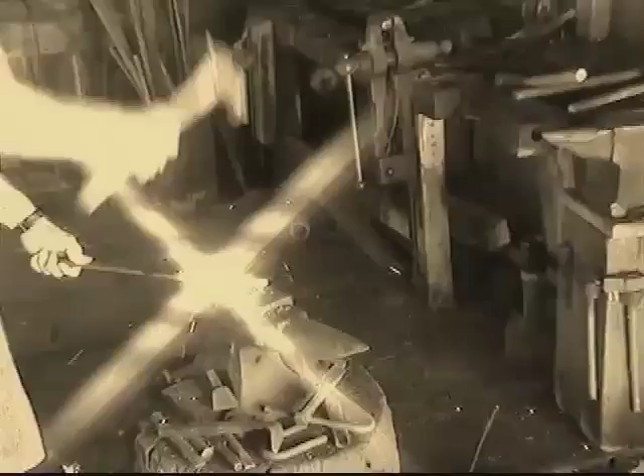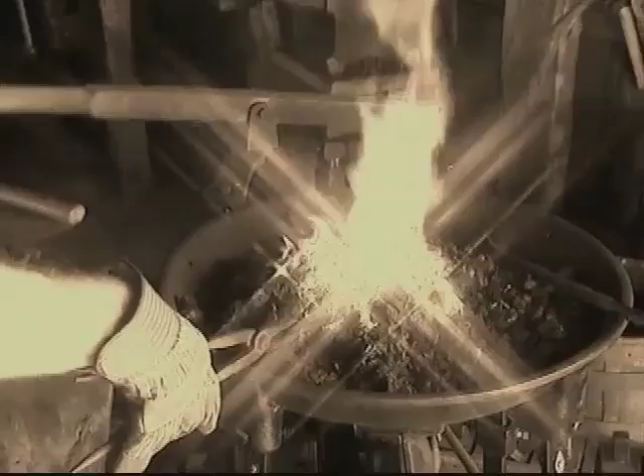Come take a journey back with us to the past, back when our company was born. A blacksmith in Cuyahoga Falls, Ohio, Eugene Cornwell, interpreted America's growing economy and feeling of well-being to mean a desire for quality. Eugene Cornwell started experimenting, trying to find the key to making a more durable punch and chisel, so the story goes. He stumbled upon a method of hardening them better than anyone else knew, and Cornwell Quality Tools was born.

On November 7, 1919, the Cornwell Quality Tools Company was incorporated in an old tannery building along the Cuyahoga River in Cuyahoga Falls, a suburb of Akron, Ohio. Cornwell employed 6, and as a testament to these early pioneers in toolmaking, many of their original tools are still in service today. Another discovery of Cornwell was most obviously discovered by his crude common sense, that of requiring a broken carriage axle of anyone desiring to purchase a punch or chisel from him.

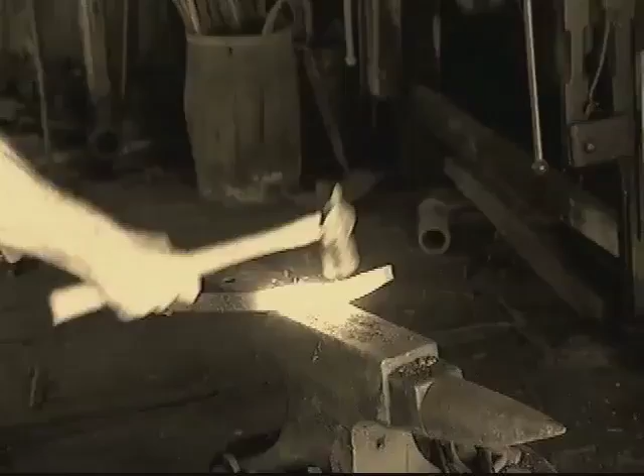In an age when iron was king, good steel was the exception rather than the rule. Having tried a bevy of metals for his use, Cornwell found the carriage axle steel was perfectly suited for punch and chisel forming. Over 8 decades ago, Cornwell became one of the first tool craftsmen to realize that 3 main keys to quality were the steel, the forging of it, and the method of heat treatment used.

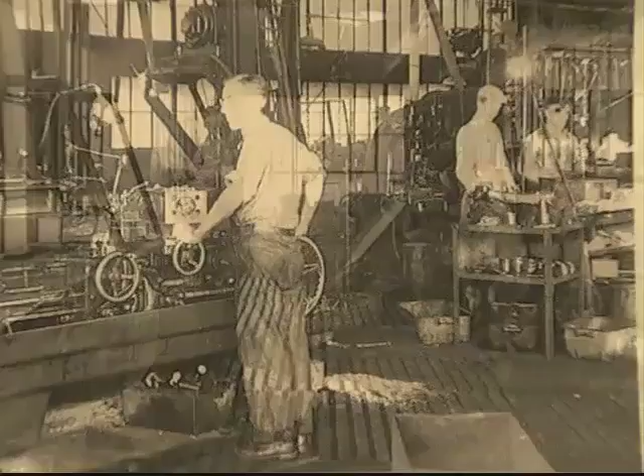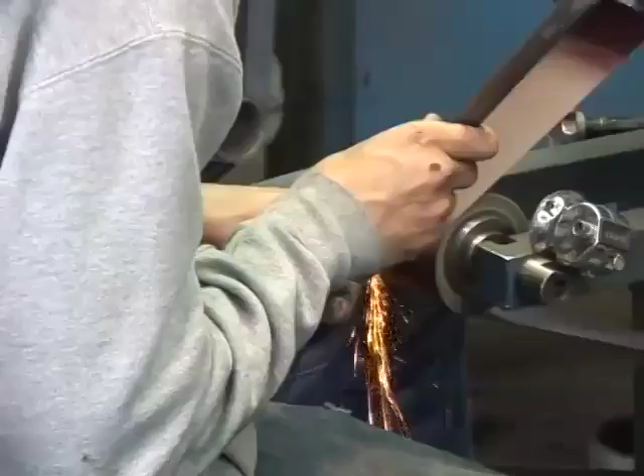In 1927, Cornwell Quality Tools needed to expand their facilities, and the Cornwell family moved their business to a site in Mogadore, Ohio. Although some of our manufacturing processes have been updated to utilize modern state-of-the-art equipment, Eugene Cornwell's desire for craftsmanship and high-quality product remain intact. It all starts with steel, the proper steel made only in the U.S. Remember Eugene Cornwell's formula for making tools?

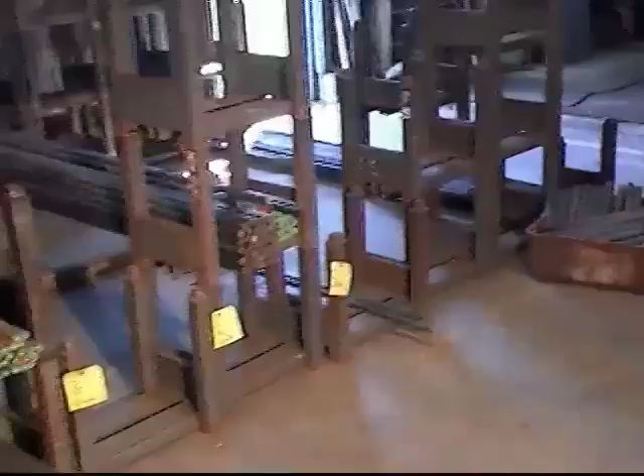Our Albion, Pennsylvania forging plant produces parts from raw steel to finish forgings for our wrench and ratchet product families. When the steel arrives in Albion, it is tagged and color-coded. Then it's inspected for proper hardness, fractures, scaling, and so on. Let's watch a wrench being produced. A shop routing tells the craftsman what steel is to be used for the job.

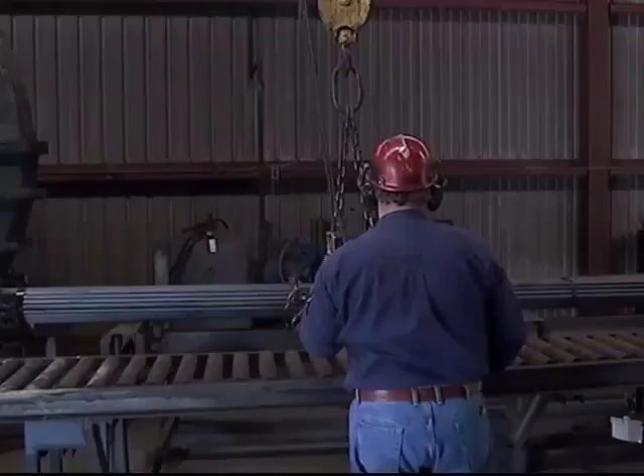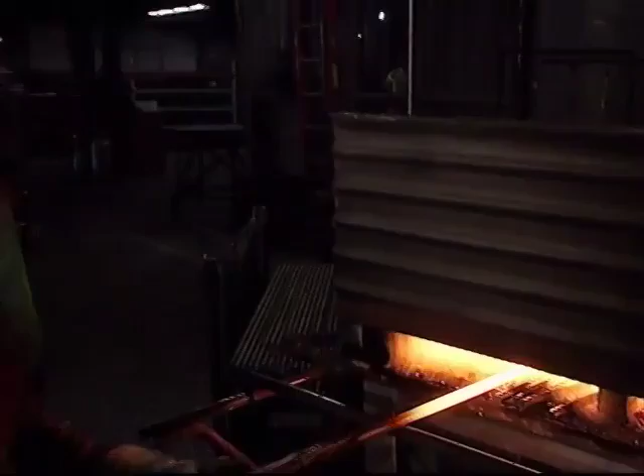Steel is taken to the shearing machine feeding bed to be sheared to forging lengths. Each bar will produce 4 to 6 forgings. The bars are racked and taken to the forging shop. A skilled craftsman heats the steel bars until the temperature is orange-yellow, roughly 2,000 degrees.

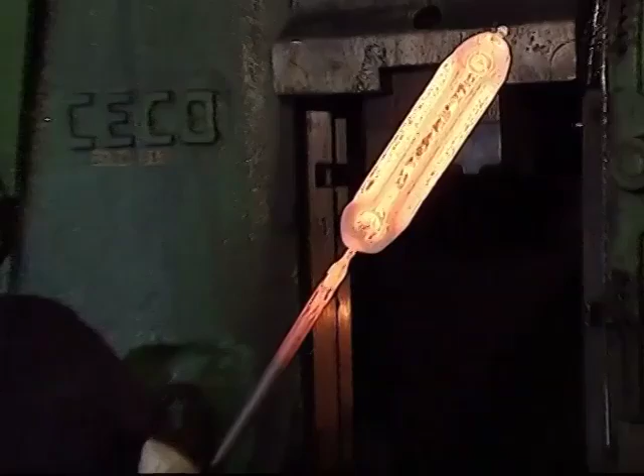The hot steel is then put through a series of 4-cavity dies to produce the raw forging one at a time. Roller, blocker, finisher, trim. It happens in quality steps. One piece of steel to raw forging by one craftsman, one at a time.

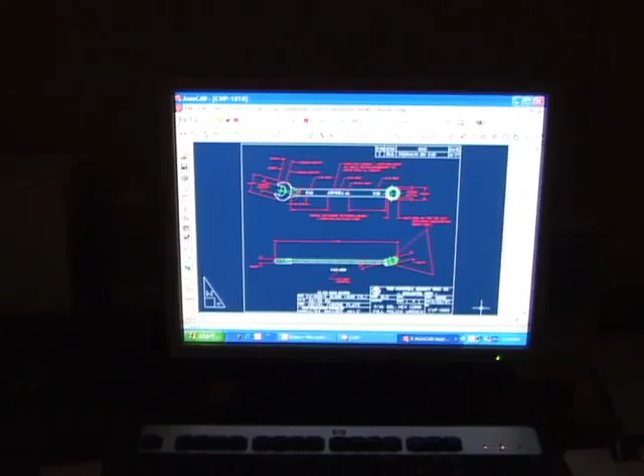You have seen how the forging operation prepared the tools for finishing in Mogadore. Now let's follow a few tools through the steps. Let's watch how combination wrenches are produced. All tools are produced from orders generated by inventory control for open stock as well as sets. The production process is guided through the shop by a shop routing. This routing jacket contains the routing and drawing for the CWP 2272 11/16" combination wrench, and it's the Bible for the production of the tool.

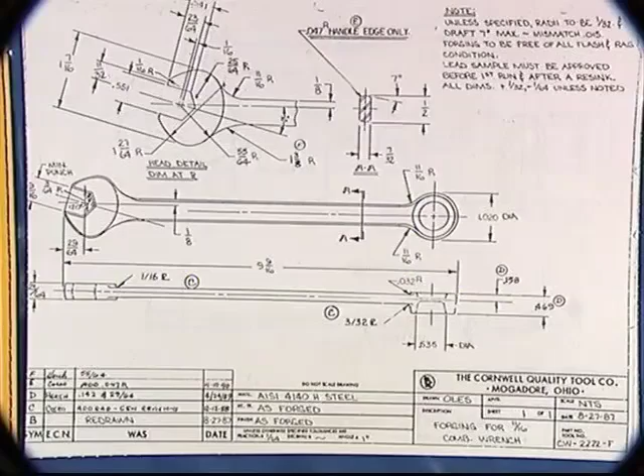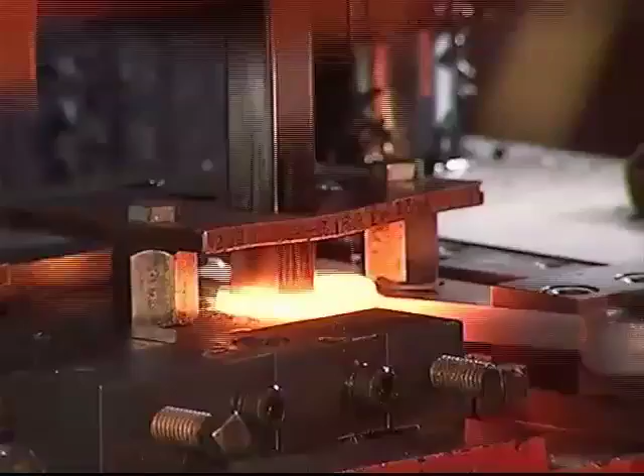It takes an average of 24 steps to process a combination wrench. Punching. Each end of the wrench is punched. The open end of the wrench is then placed in the press facing right, then flipped over facing left. The boxed end is also punched in 2 steps. Wrench forgings are placed on the furnace shelf, heated by induction to a precisely controlled 1500 degrees, or a cherry red color. Note, the operator does not let the part get too hot. Punching a part that's too hot can lead to scaling and quality issues.

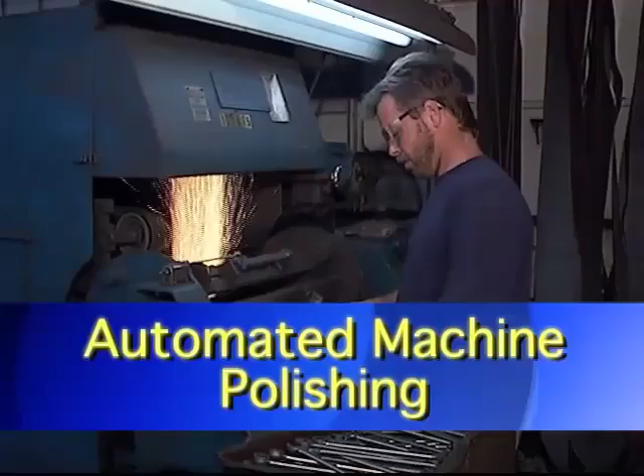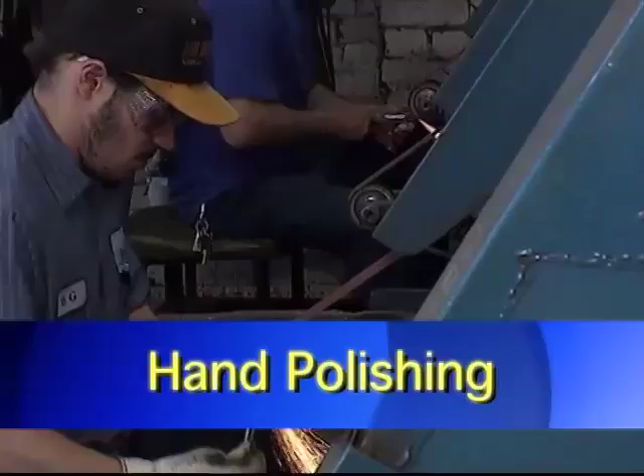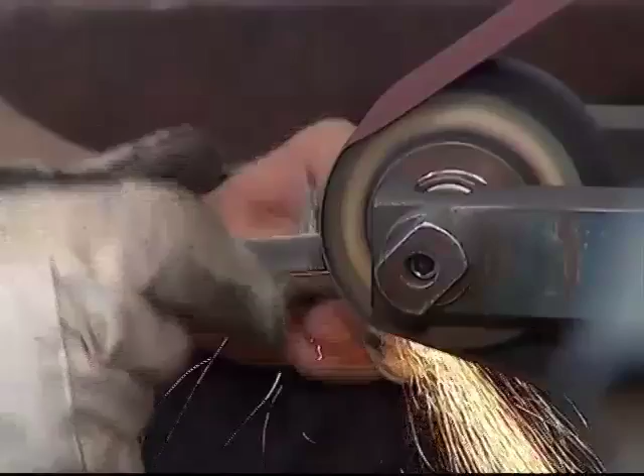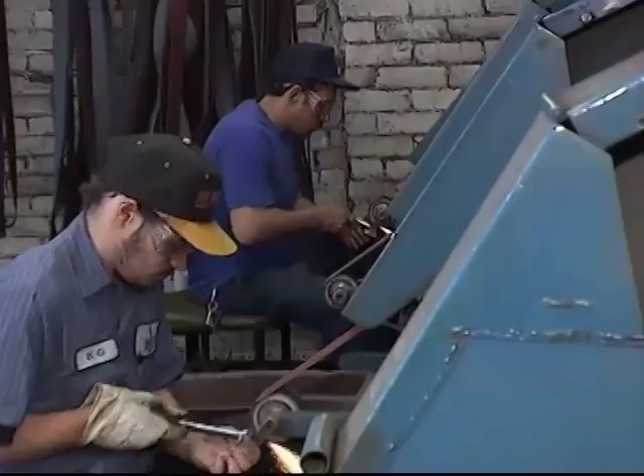Automated machine polishing. You're watching a Ryman polisher. This machine provides a consistent polish to the flats and edges of the wrench forging in preparation for hand polishing. Hand polishing. There's a need for skill in the polish department. An employee must have a good eye and hand coordination. The operator must also possess a good sense of what is cosmetically acceptable in a finished polishing operation. The operator determines the speed in which he can obtain the best results. This is why a good eye and hand coordination becomes so essential. The employee develops a rhythm while working on a particular part.

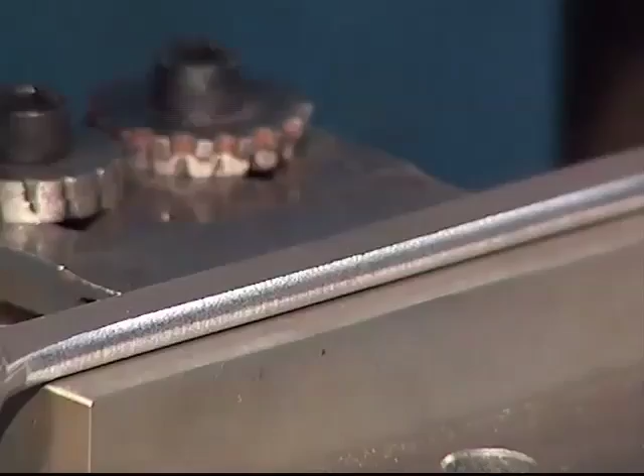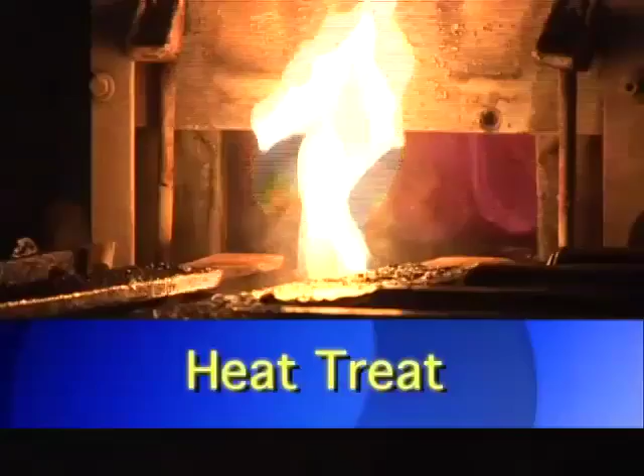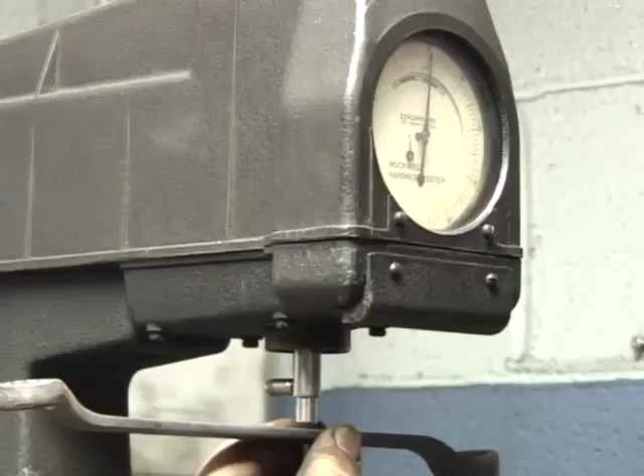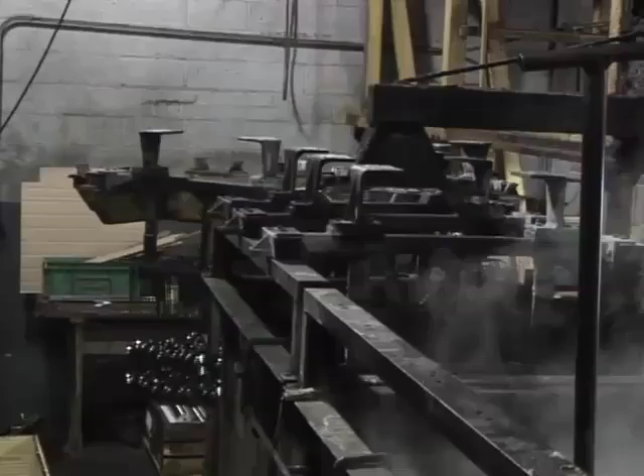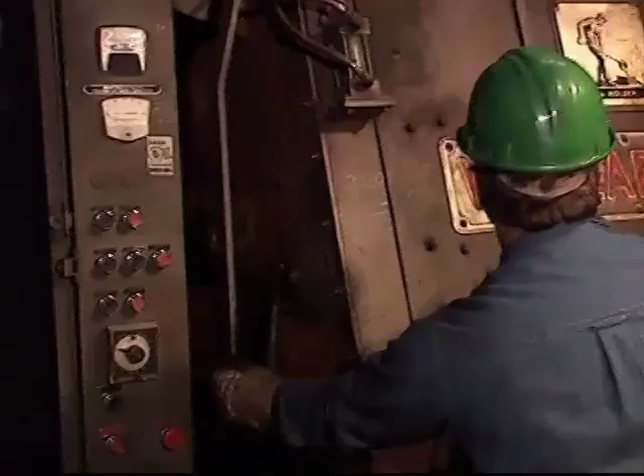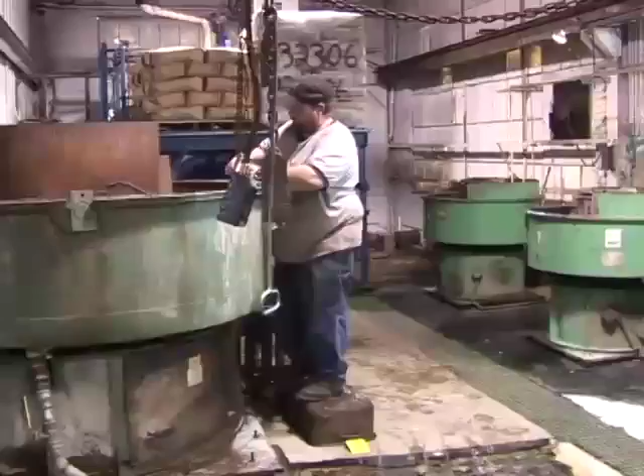Wheelabrator. Wrenches are put in and blasted with steel abrasive shot to remove scale created during heat treating. The blasting operation takes 5 to 20 minutes to accomplish. Vibrators. This operation is the last before chrome plating. The parts are loaded into the bowl with ceramic stones and chemicals. The steel reacts to the chemicals and the stones polish the steel clean, causing a smooth yet high luster polish. Chrome plating.

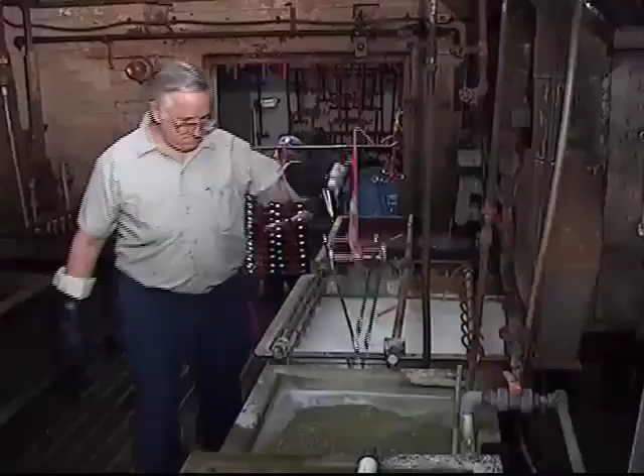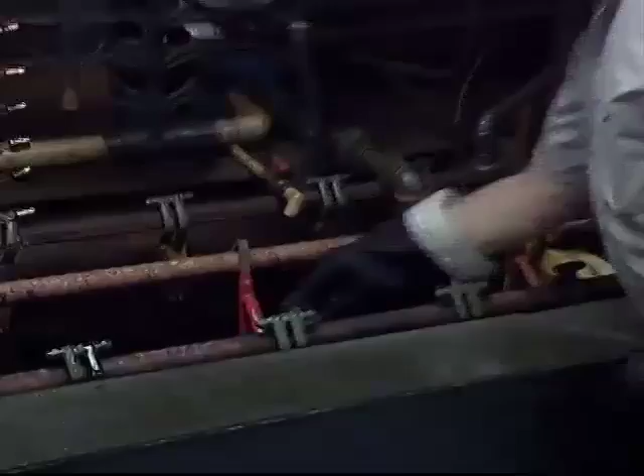The high luster of the nickel must be protected because it's very soft, so a layer of chrome plate is applied. This makes the wrench beautiful while protecting the surface for long life. Parts are immersed for 8 to 12 minutes in the electro-nickel solution, and through electrolysis, the nickel adheres to the parts. They are then rinsed 4 times before submersion into the chrome plating solution.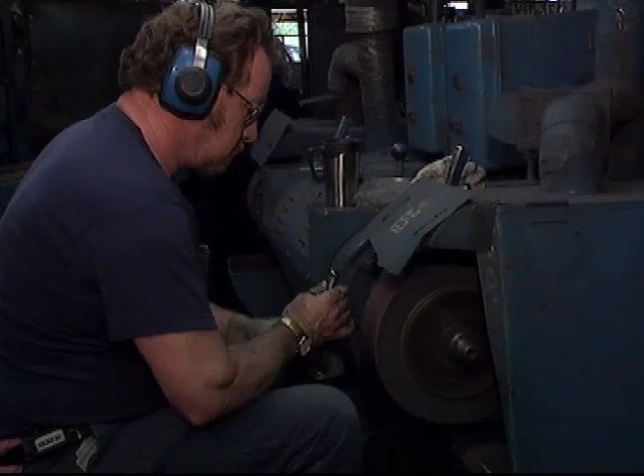Because of the nickel plate, the chrome adheres to the part after sitting in the bath for 1 to 2 minutes. The parts are triple rinsed, blow-dried, and unracked. Inspection. Our company is employee-owned, empowering the employee to make immediate corrections if they notice something wrong during the inspection process. Final inspection is where the sampling of the parts completed is thoroughly inspected for flaws in cosmetics and dimension.

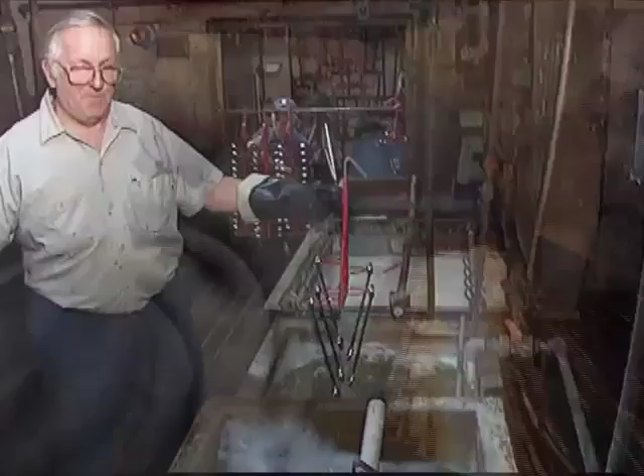We do not have 100% inspection because the machinists, the grind and polishers, and the platers handle each piece and can reject any part out of tolerance. Again, we want to emphasize that each employee is an inspector of their own work and can tell if the operation before was done correctly. We tell each employee, if you would not buy it, don't continue to work on it until it's inspected and/or corrected. Socket. Now let's watch a socket being produced.

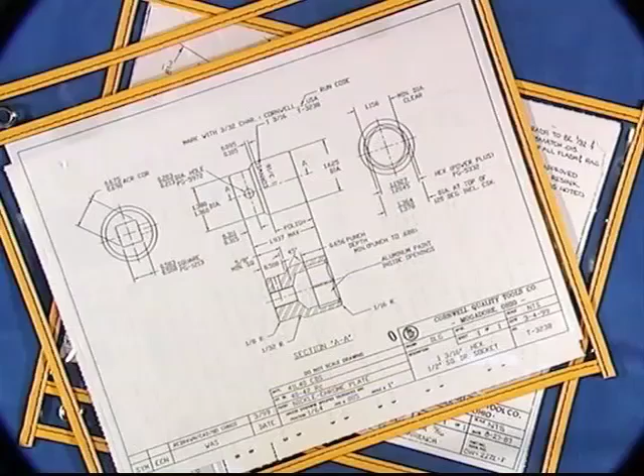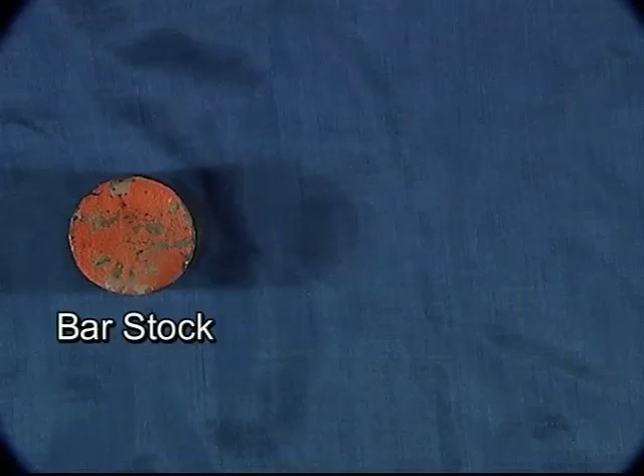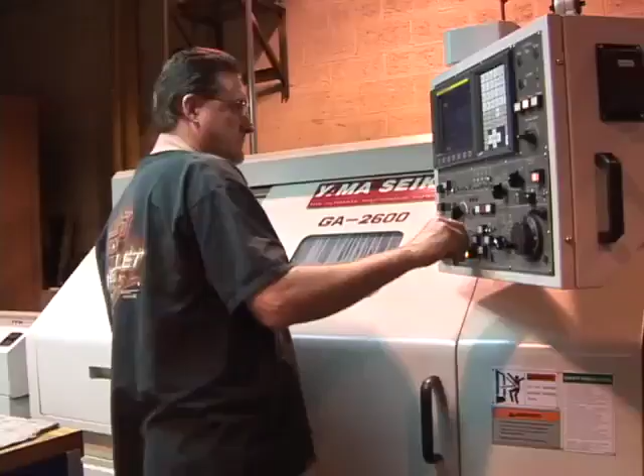Again, a shop router guides the production process. This routing jacket contains routing and drawings for the T3238 1 3/16 inch chrome socket. Manufacturing steps go bar stock, socket blank, secondary operations, and completed socket. It all starts with US-made color-coded steel from our steel room. A series of computerized CNC machining centers are the main machines used to blank out our socket families.

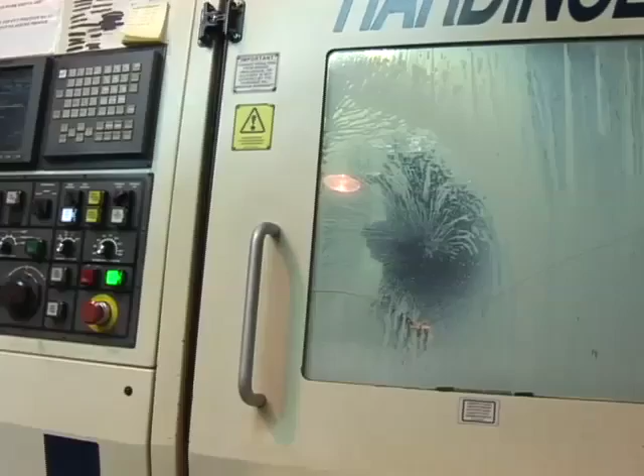You are watching a Hardinge CNC lathe set up with proper tooling. Bar stock is loaded, feed speeds are established on the control panel, and the machine does all the work. Machines can produce socket blanks from 7/16 to 2 3/8 inch diameter sockets. Omni or Hardinge Talent CNC machining centers are used for secondary operations, such as chamfering and nose turning.

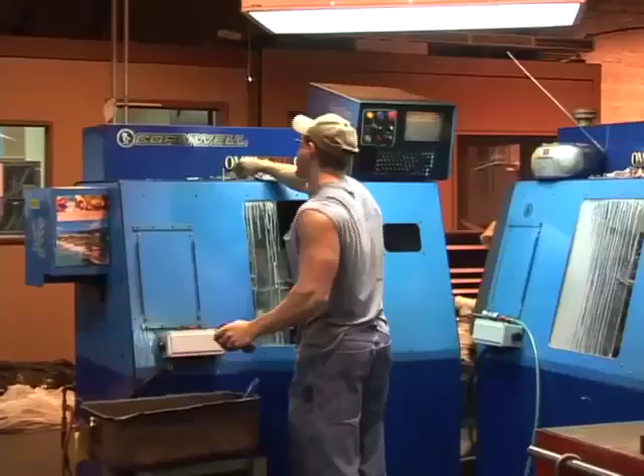As you can see here in the samples, the inside of the machines have a stationary position for the tooling, where the steel bars are rotated against the tooling, shaping the part and cutting off the finished part. Punching. The working end of the socket is cold punched either 6-point or 12-point, and the drive end is punched to drive size.

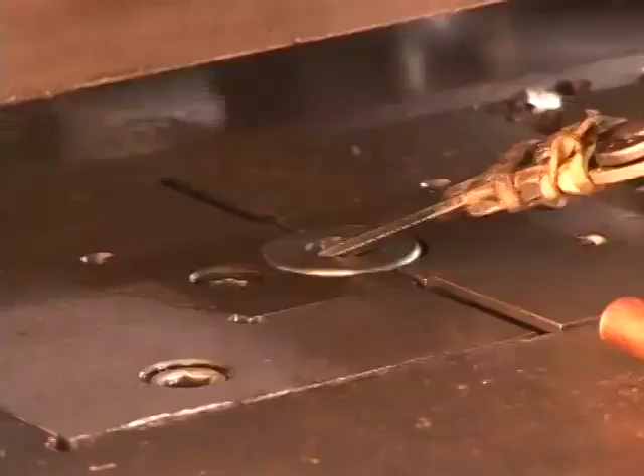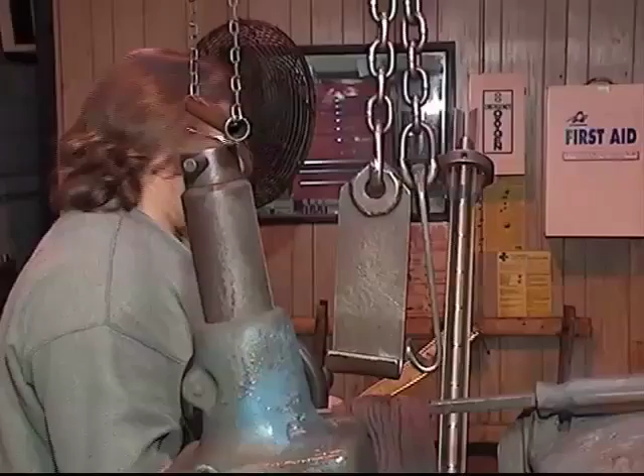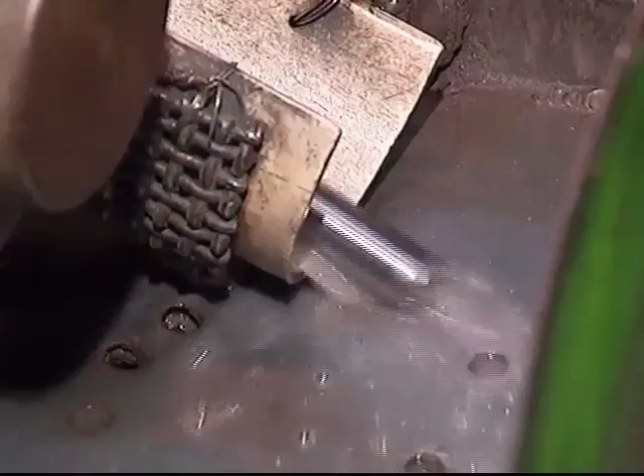Centerless grinding. In this step, the parts pass through the grinding wheel and regulating wheel and do not have to be held. This machine is capable of grinding 12 1/1000ths of an inch off our sockets to round them out symmetrically. A normal cycle time, again depending upon the part size, is 1 to 5 seconds. It only grinds off the OD, or the outside diameter. Sockets as small as 7/16 diameter and as large as 3 1/2 inch diameter are run across this machine. One operator handles the entire product across the machine.

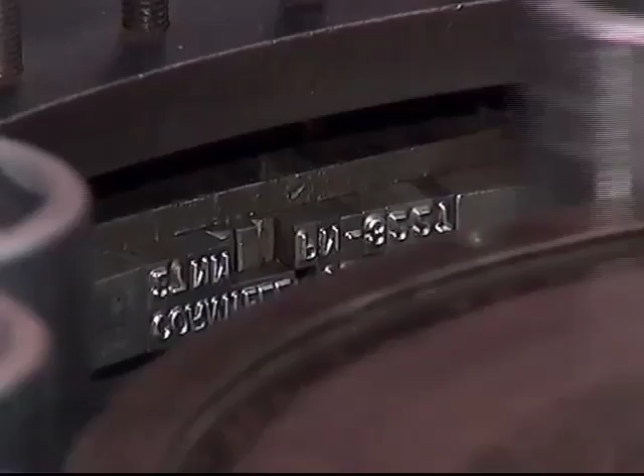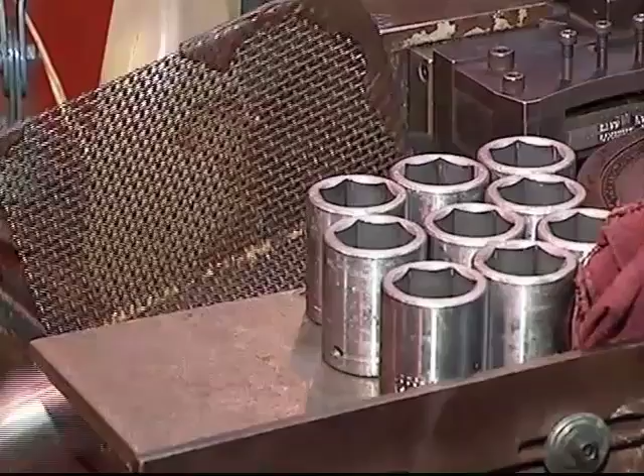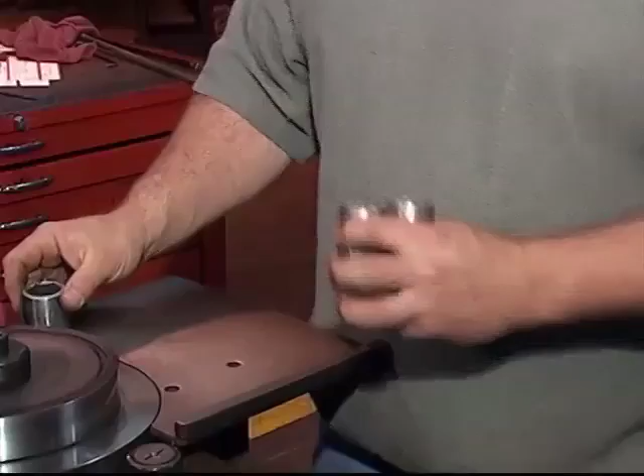Marking. This operator sets up the machine and imprints all of our round tools with the Cornwell name, the run code, the socket size, and part number. This operation is usually done after all machining operations are performed. The markings are imprinted before heat treatment for hardness and prior to polishing operations and chrome plating. An employee is able to mark up to 10,000 pieces per day, again depending upon the size of the run. An average run of 250 pieces may take 15 minutes to run after setting the type.

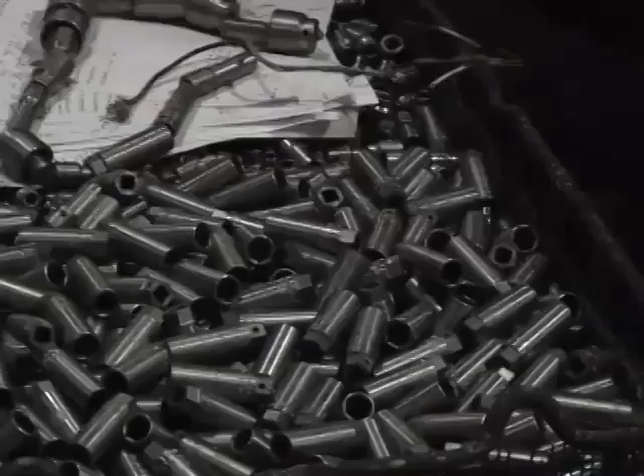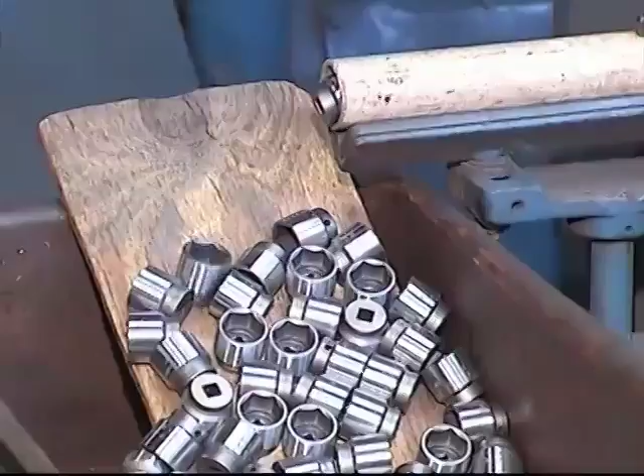Heat treat. Sockets are then heat treated and tempered. Random samples are checked for correct hardness and torque tested. Polishing. Sockets go through a polishing operation in preparation for vibrating and plating. Chrome plating. The sockets are then chrome plated. Voila! A completed socket.

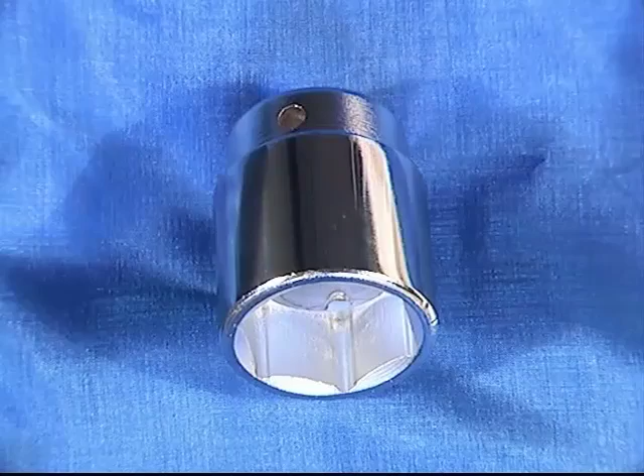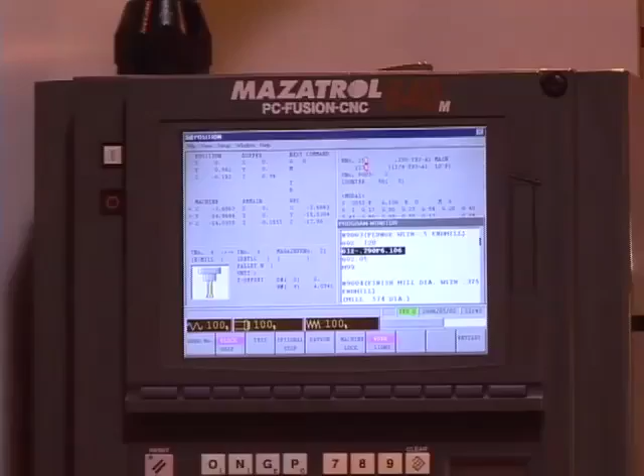Ratchets. Forgings arrive at our Mogadore plant from our forging plant in Albion, Pennsylvania. Forgings are then loaded into this multitasking Mazak CNC machining center. The machine is set up to perform the first 10 or 12 steps in our famous ratchet families, and then on to finishing. After all the manufacturing steps, the tools are brought to our corporate distribution center in Wadsworth, Ohio, for shipment to our customers. In this modern facility, great care is taken to process orders. Most orders are shipped the same day.

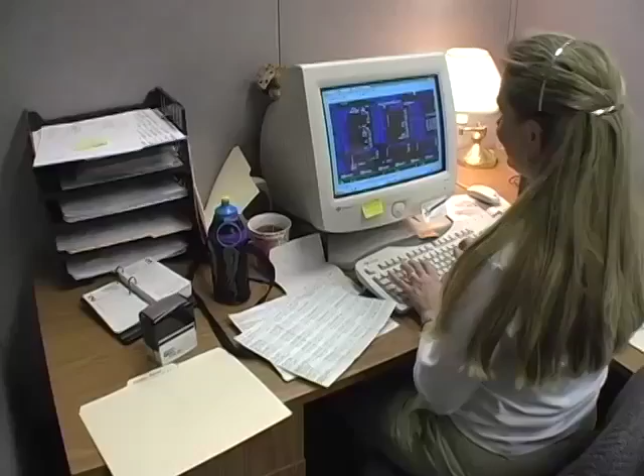Good morning, Cornwell. May I help you? Order processing. It all starts with a friendly voice from our customer service department. This group of dedicated specialists is just another extension of the Cornwell family. The Cornwell management has remained responsive to the changing needs of their dealers. We are now the only mobile tool company left in America who guides their own destiny by manufacturing their own product for their one customer, the Cornwell dealer.

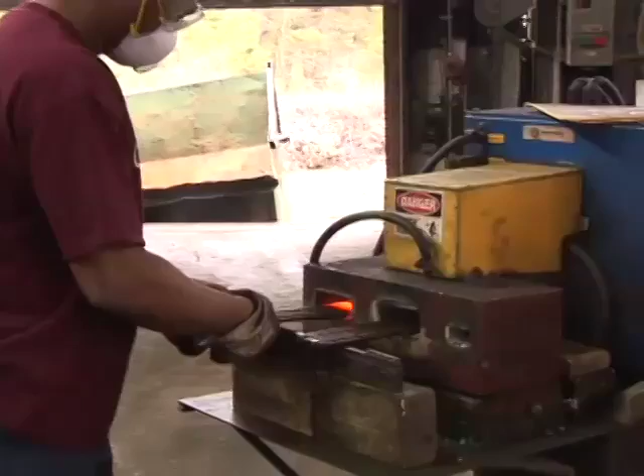Pride of workmanship by Cornwell's employees comes from the top down. Ever since the beginning, Cornwell has been owned and managed by family. Now, pride is felt by each employee because the employees own the company. There's no better assurance of quality and service than the personal pride of ownership. Only time will tell what new exciting ideas and changes lie in store for the years to come. However, they will surely come from us, the Cornwell family, who produce and sell the finest tools in the world.